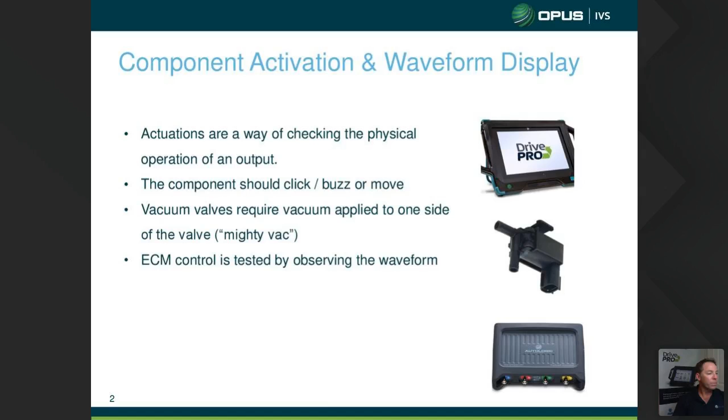It will check the ECM's ability to deliver a control message to that actuator or to that component. And the PicoScope's great at displaying that in nice pictures.

With any test we do, we have to have a reason for going there. So for this particular vehicle, I picked an absolutely brilliant car that always has faults in it - my Q7. I tend to use my Q7 whenever I do training because it doesn't matter, there are always faults in that Audi, and they'll be different every time. If you ignore one fault for long enough, it goes away and a different one comes in.

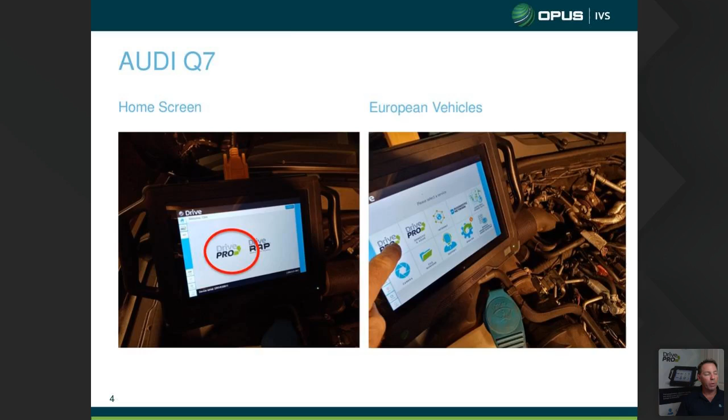So the first thing we do, we need to know what the faults are, so we do a quick test. It's quite simply plug the Drive Pro in, select Drive Pro, select European, select VAG because it's a Volkswagen Audi Group vehicle. Then we do our automatic detection, and it's picked up the VIN, it's picked up the engine code, and then we just hit continue.

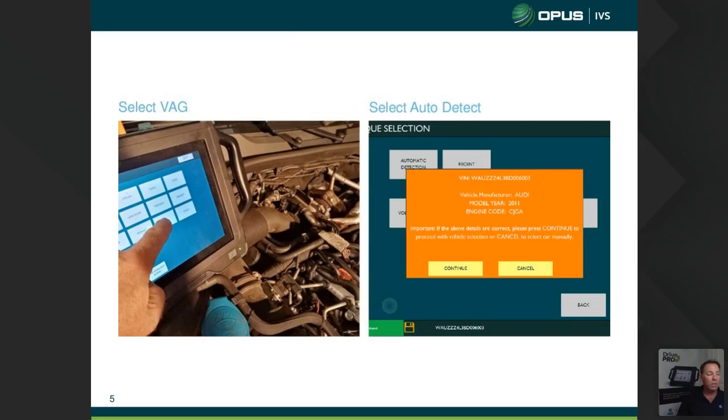Once we're into the vehicle, this is the menu that comes up. The first button on our Drive Pro tool is always Quick Test, and it's generally there for this reason because that's the first test we should be doing every time. We need to know what's going on with the car, so we run our quick test so we can actually produce a report.

The report gives us all of our DTCs along with freeze frame data that occurred when that DTC happened. So we've run this quick test report, and there it is. If you've got your downloaded files ready to go, you'll be able to see that a little bit clearer. But basically we've got an intake manifold flap, airflow control valve, electrical fault, sporadic - so it was intermittent. And the second code, we've got intake manifold flap, position sender short to positive, which is quite interesting.

As soon as I saw this, I was thinking, great, how much more money am I going to have to spend on this car? But it's good, it's great for training - you learn a lot working on Audis. So they're the two faults, they're the two components we're going to test.

We're going to go through and do the activations to actually test that intake manifold runner solenoid. So that's where we're talking about a dual plenum manifold, where we've got long paths and short paths, and the manifold just has a valve in the middle, and it changes from that long to short path depending on whether we're looking for engine torque or whether we're looking just for outright engine power or wide open throttle.

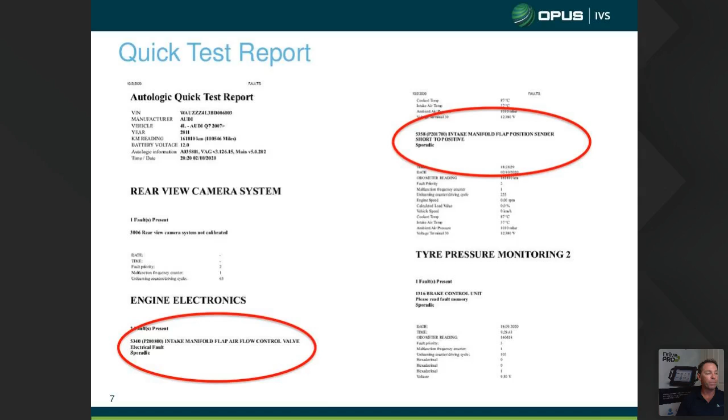So we're going to have to activate this with the scoping to see why - we want to know why it logged that code, we want to know whether the signal's getting down to the manifold itself. So we have to go into IMRC actuation, which is intake manifold runner control.

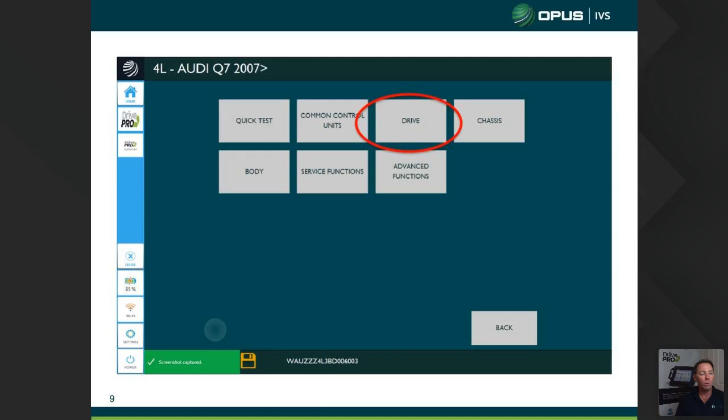So that's very simply from this same menu where we did our quick test, we come across to our drive unit, which is our engine control module. Then we select our engine electronics. Now in drive, we've got transmission as well here - we could do these same tests or similar tests on the transmission control, operating some transmission control solenoids, just to check and see why it's not changing in fourth gear or fifth gear or sixth gear. In this case, we're selecting engine control electronics, and then we hit next.

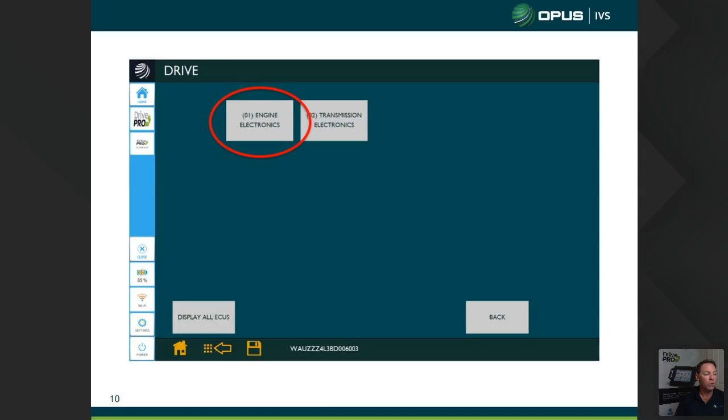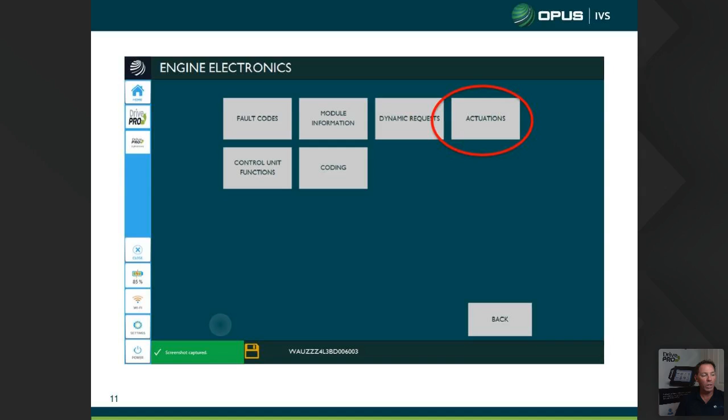So straight up when we're in engine electronics, we've got fault codes, module information. Dynamic requests in Audi is data - it's live data, it's data that's occurring, and they're all in measuring groups the Volkswagen way. Then we've got actuations, control unit functions, and coding for this particular vehicle. So we click actuations, and then we have these - we've got 2 pages of engine actuations.

Now, this is quite clever, this system, because I didn't realise there were so many output control devices on this Audi, and these are the ones we can test - the ones we've actually got capability of operating. Now, this particular car has active engine mounts - I didn't realise it had that. It also has an oil control valve solenoid or an oil pressure regulator valve solenoid, so the ECM can control the output oil pressure to the timing chain tensioner and other devices around the engine, which again, I think is a very, very clever system, and I didn't know the car had that. So we've got 2 pages on this particular vehicle.

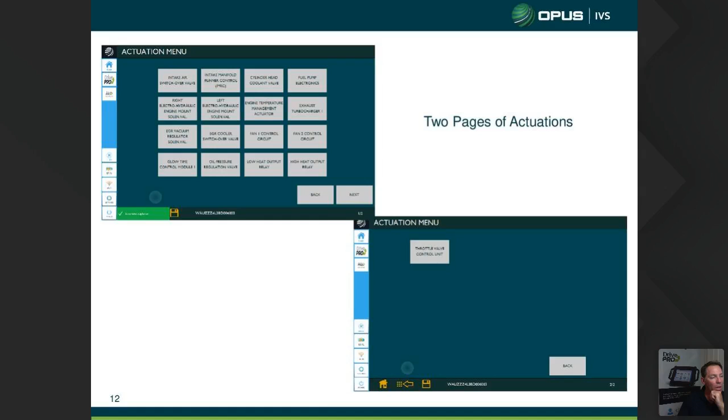So we're actually going to look for intake manifold runner control, which is on our first page.

Switchover valve. So these are all the ones we can test, and we'll test about 4 or 5 of these tonight.

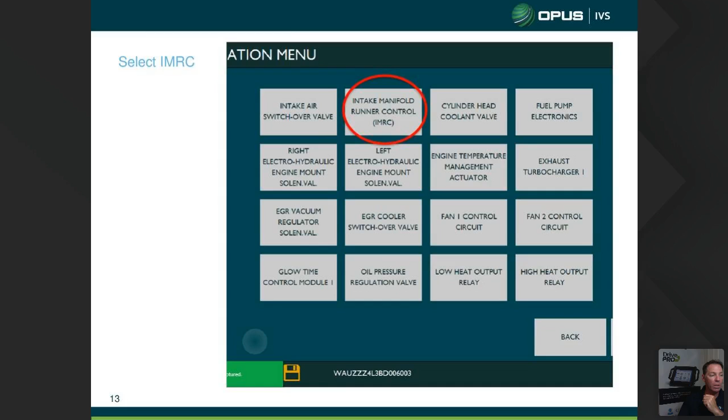We're going to click on the IMRC because that's where our fault code was. So we've clicked on that, it then goes to another page. We click on that and we get ready to actuate. But there's no point activating the solenoid until we've got our oscilloscope attached.

Now, with these particular cars, they've got valves and solenoids and actuators just mounted all over those engines. It's just an absolute mess. So sometimes I struggle knowing which valve is for what or which solenoid does what on the car, especially when you've got a bank of 3 or 4.

So what I used here, which is also on the Drive Pro tool, is the AutoLogic guided data. So we'll just recap. We did our quick test report, which guided us to a fault in the IMRC. We had a sporadic problem or a short to voltage problem. We had to locate the intake manifold runner control, and I did that using our AutoLogic data, just clicking on the location of that particular device. Now it's on the intake manifold.

Now there were 2 motor control units there and 2 valve type units, and you can see there's actually 2 valves in there. It could have been this one or it could have been that one. Guided data told me it was this H5, which was great because that's what I have to test. So the next thing we need is a wiring diagram so we know which pins to probe.

Now what we've done is we've located, if we go quickly back here, that's our diagram. That's obviously the pictorial diagram of the IMRC. We come back under the bonnet. Now that's somewhere at the front here in this bunch of mess. And if we just zoom in, we can see where our wires are.

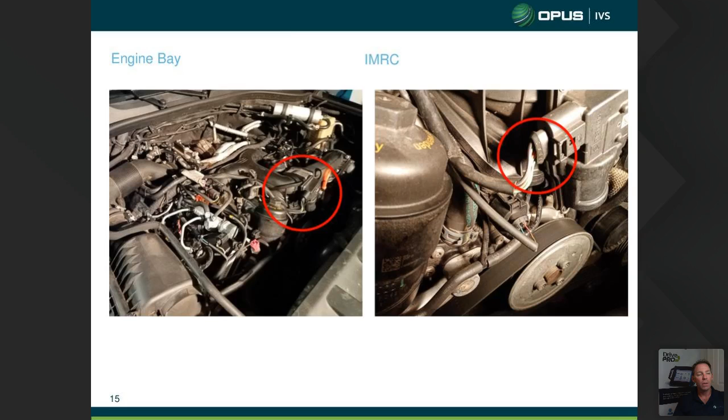And I think we've got 5 or 6 wires in this harness. And it's one of those 5 or 6 that we're going to probe, or 2 of those 5 or 6 we're going to probe.

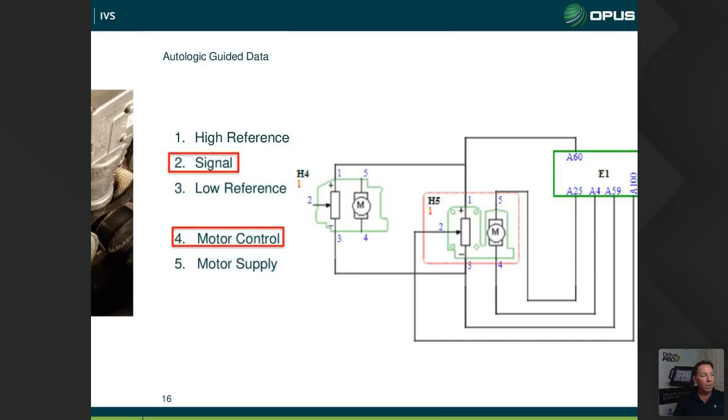Okay, so here's the circuit diagram that relates to this control unit. So it was H5, using AutoLogic guided data. Again, H5 is highlighted. What we've got labelled over here are what each of the numbers are, each of the terminals. Terminal 1 is the high side, our high reference from the ECM for the switch or the position sensor. Terminal 3 is our low reference, that's the negative side.

Terminal 2 is our position output, so that's our signal output there, number 2. So we're going to monitor that. We'll put 1 trace or 1 scope lead into that number 2. We'll back probe that one.

But we also want to make sure that the engine control unit is driving the electric motor over here. Now, we've got the high side driver on pin 5 and the low side control on pin 4. So the way these ones work, we've got 12 volt supply to one side of the motor all the time, and then we basically PWM or pulse width control the low side, the ground side.

So that's the one we're going to go for. We're going to go for pin number 4 and pin number 2. So when we actuate it with the scan tool, we can actually see, one, that our motor is getting a signal, something's happening there, so we should see a signal, we should hear a noise, we should see a valve open. But I also like to look at the position sensor as well, just to make sure that that is feeding back to the ECM, to make sure there's no problem there.

Now remember, when we use the scope to look at any data, we're looking at real data. We're looking at data that's actually happening at the actuator. We're not looking at modified data that we will see with the scan tool. So always keep that in the back of your mind.

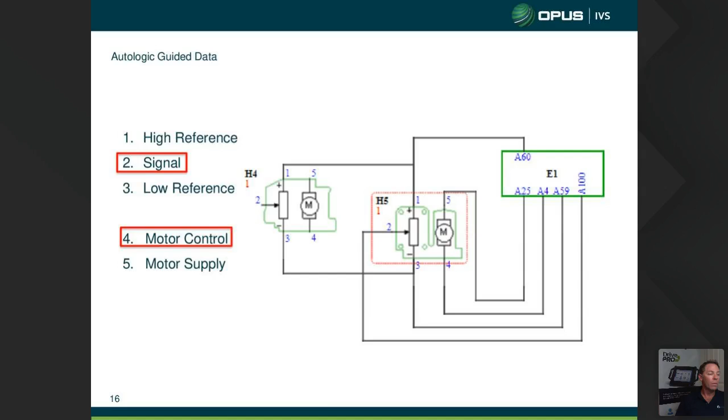And I have been caught where the data that I've been reading from the ECU is different to what's happening at the actuator. So when I do these tests now, I always use the scope. All right, so we know what we're going to probe on, pin 4 and pin 2.

All right, so with our oscilloscope, we need a ground, and this particular ground, I'm using a black alligator clip, and that's just up on the negative jump post, which is in the passenger side of the engine bay, towards the rear of the engine bay.

And here we are with terminals, back probe terminals, the pin terminals going to, I think it was number 2 and number 4. And I've color-coded them, so red is going to be channel B and blue will be channel A.

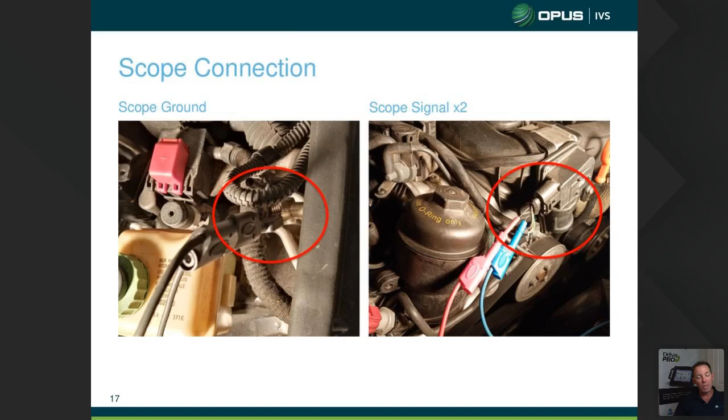So the next thing we have to do, once we've back probed, once the scope's connected, once we've got a ground on, we need to press Actuate on the scan tool. And the great thing is, that's all it is. That's your button on the Drive Pro, so it's pretty damn simple.

Now, whenever Drive Pro actuates on this car, what it does, it turns the component on, then off, then on, then off, and it repeats it about a dozen times. And it leaves it on for a few seconds, turns it off for a few seconds.

So basically, it doesn't just trigger it once. And I have had some scan tools that have done that, and it's a pain because by the time you've triggered it, you might not have recorded it on the scope, and it's a bit of dicking around. So the idea of the way the Drive Pro does this, it'll repeat the pattern, repeat the pattern, repeat the pattern, and it does it for every actuation.

And you'll see that when we see the waveforms, you'll see the pattern that's very, very repetitive with the same time base. So here we go. We're going to press Actuate and go to our scope trace. So what I was using was Pico 7.

I was using the new Pico software here. Again, it's not that much different to the old software. It's just it's a lighter version, probably a little bit faster. Definitely works on tablets very well. So let's have a quick look.

The red channel was going to my intake manifold runner control motor. So that was going to the ground side. If you remember the circuit diagram, that was going down to the low side of the motor. Our pin number 2, which we've got plugged into the position sensor, so that's channel A.

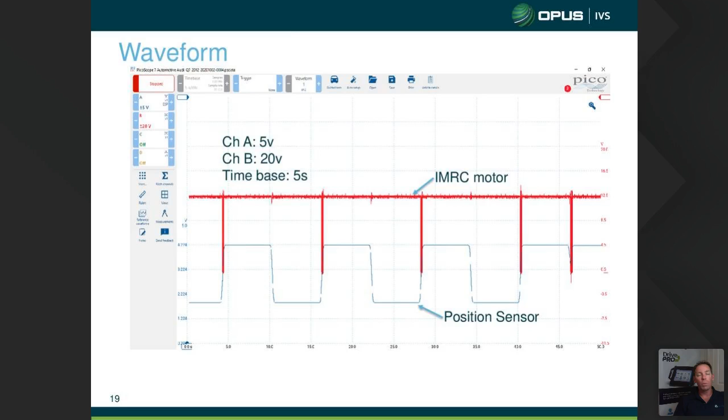I'm not seeing a lot of that signal, so I have to decrease my time base or zoom in. I'm going to change that back - let's have a look at the next page.

We've changed that back to 2 millisecond divisions, so rather than 5 seconds across the bottom, we've got 2 milliseconds across those divisions. Voltage is exactly the same. We need 2 milliseconds because that's how fast the driver in the ECM is activating this electric motor. We're sitting up here at about 12 volts - that high side is our 12 volt supply, and when it pulls down low, that's the low side. That's the ECM grounding that circuit to pull the motor open.

So you can see our on time between that point and that point is quite a lot more than our off time, which is that point to that point there. So this is driving the motor very, very slowly. Now, as our motor speed increases, the low side, or the time that it's actually pulled down to ground, will increase as well.

What we tend to look for here is just a nice square wave pattern, because what we want to see is that the driver or the transistor and the control module is doing its job - that the transistor is going open, closed, real square wave, real digital pattern. That's what we need to see across the bottom here, and we're getting that signal all the way.

There's always a little bit of a spike at the top because we've got current flowing through a conductor, so when we turn it off we'll always get that little bit of back EMF. It's very similar to the back EMF we get from a fuel injector when we turn it off, just a little bit lower. So that's a good pattern. There's no reason that code should have come on other than the fact it was an Audi.

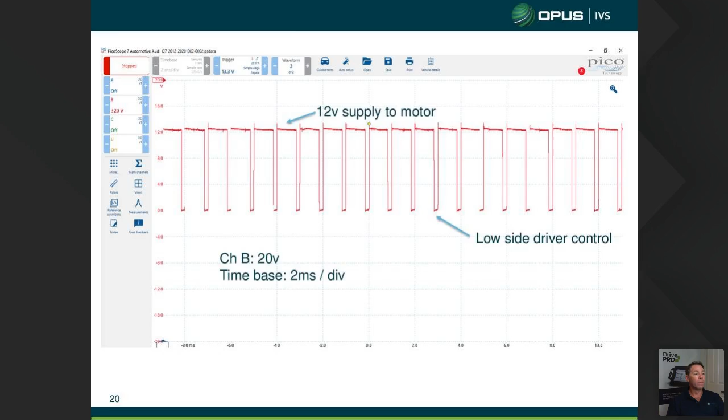All right, so let's move on to the next one - the EGR cooler switchover valve. That's one we're going to test next. We didn't have a fault code for this, but because we're doing component activations and this is another nice, easy one to get to, we'll do it. We'll have a look at it.

So again, back in our actuation menu, come down here - EGR cooler switchover valve. Now, I had no idea where this was, again.

So I'm going to use Autologic guided data. Just excuse me - apologies for that, I needed to sneeze.

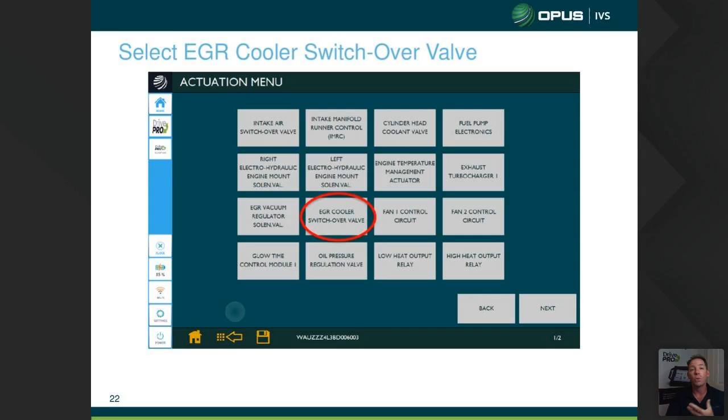Okay, so EGR cooler switchover valve - we don't know where it is, so we're going to use Autologic guided data again to find out. Here's our circuit diagram that's come up. So when we punch that into the guided data, it's told us here's the code for the solenoid valve, V8. Now it's just an electromechanical solenoid, and it's showing us it's a vacuum solenoid.

So we could test this solenoid by disconnecting one of those vacuum lines, putting our Mityvac on it, and applying vacuum pressure - hello Patrick, that's good - and then using the Drive Pro to activate it and watch our vacuum drop down every time it opens.

So what I'm looking for here is the scope side. I want to see that the signal is getting to this solenoid and that we're getting the right feedback. So the fact that it's an electromechanical device or a solenoid, we should see some sort of square wave and some sort of back EMF every time. Number one is 12 volts, number two is our low side driver, our low side control.

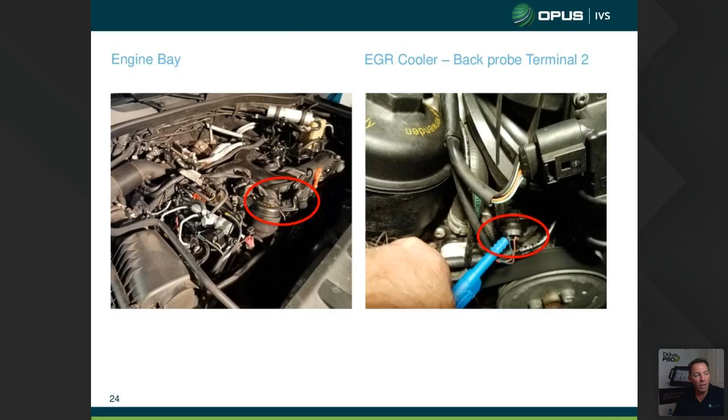Right, so this is the area this particular solenoid's in. I did use the guided data to find this, but I haven't put that page in here. It actually hides right down under here where we were testing 5 minutes ago. So that's that plug we were testing at, and it's actually down here. You can see the two wires, terminal 1 and terminal 2. If we go back to the circuit diagram, there's terminal 1, terminal 2. Now it doesn't look like it, but I am actually in terminal 2 here, the ground side.

All right, so while we've got the scope in, let's press actuate and look at the waveform. This is much more exciting in real life, by the way - you're looking at photos at the moment, but when we do this for real in a classroom, whenever we're allowed to get back to that face-to-face training, it's definitely much cooler.

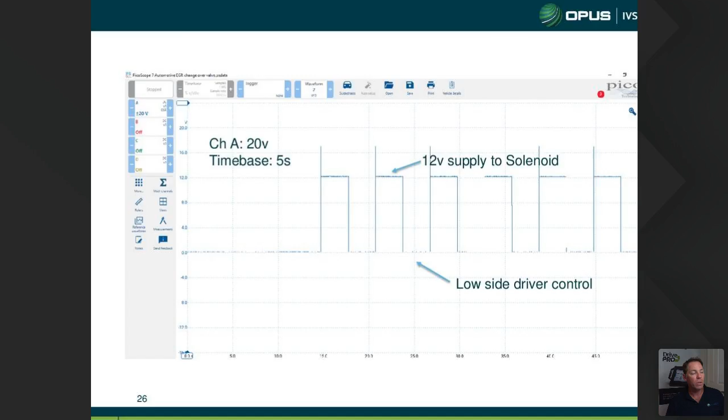All right, time base 5 seconds. The reason I'm using 5 seconds is because it's a real-time measurement. We turn it on, we turn it off, we turn it on. This is the test that the AutoLogic tool does, the Drive Pro.

So there's a 12 volt supply. Even though we're probed in with one probe on the drive side, whenever the driver is turned off, we're reading voltage through from the fuse down through the solenoid to where we're actually back probed, which is why we'll always see 12 volts there. And then when the driver in the ECM pulls it down to ground, we see the signal get pulled down to ground. Now we can see it's pulling down there.

Now, while this is activating at the same time, make sure if you guys are doing it, just put your hand on the solenoid, make sure you can feel it clicking. Put your Mityvac in, apply vacuum to it, make sure you can see every time it clicks, we lose vacuum. But what we're checking here is the activation of the component.

Now, here's our little back EMF. This is what I talked about before. So here's the solenoid turned off. As soon as we trigger it, it comes back on and we get this big back EMF spike. So we need to see that. If we're not getting a back EMF spike and we're just getting a square wave pattern, there's a good chance that the solenoid's not working properly, or the solenoid's stuck, the solenoid's not moving.

Think back to when we talk about fuel injectors, if we don't get that back EMF spike, we're not actually getting the pintle moving and collapsing back across itself. The same sort of thing happens here. If we're only getting a square wave pattern, then we're getting the driver signal down, but we're not getting this mechanical movement inside there.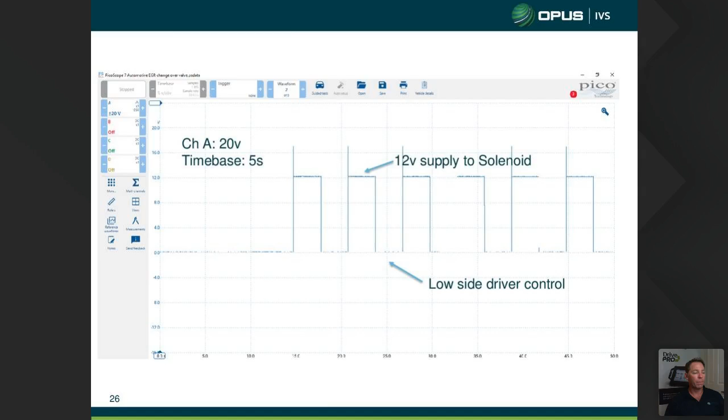Okay, our next one. So this is quite interesting. Fan number 2 control circuit. So you would have seen back on our actuation page, we can control fan 1 or fan 2. This thing's got 2 dirty big fans like this on the radiator.

Now, each of those fans has its own control module. And the control modules are fed with 4 wires. One of those wires is high current power, one is a high current ground, one wire is a ground for the computer, the little control module itself, and the other one is a LIN bus wire. Because the way these are controlled, these are a master-slave system. The ECM, the engine control unit, is the master unit, and the fan control module is the slave unit. So it actually sends a signal via LIN down that particular wire.

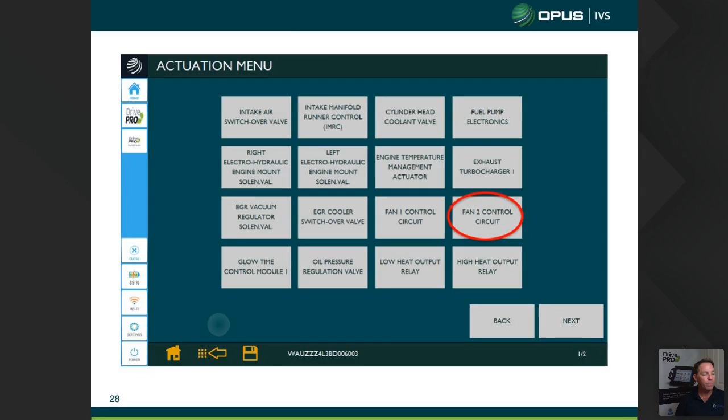All right, so let's look at the next one. So because we're testing an electric motor, I like to use an amp clamp, exactly the same way I would test a fuel pump. Now, looking at electric motors with an amp clamp is very cool because it actually tells you if the motor's moving.

In this case, I'm going to test a fan motor exactly the same way. Low amp clamp over the high current wire. If we look back here, that is going to be over this one, so terminal number 1, that's my high current.

And then channel 1, I'm going to back probe into the LIN bus wire, and the LIN bus was terminal 3. So what I'm looking for here when I do my activation, I want to see that we've got LIN control. We want to see the LIN circuit or signal change from off to on. And then I want to see the current ramp up using the amp clamp, and I want to see it reach whatever the fuse on this circuit's rated at.

I can tell you that if I clicked on that fuse, that would be a 25 amp fuse. So what I'd want to see out of this electric motor is somewhere around 15 amps peak, so sort of two-thirds of my maximum current flow. Okay, here we go.

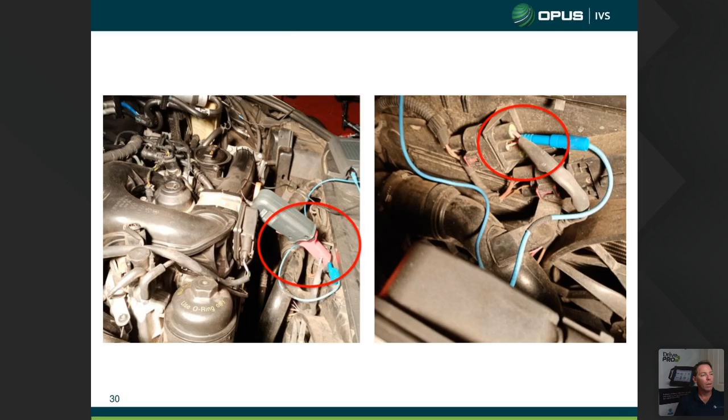Press actuate, and go to the scope, and we'll see what happens. So our first page, I've turned off the amp clamp just to make this one a bit clearer, plus I've also had to zoom in a lot to see the LIN message.

So when I use an amp clamp and I look at an electric motor, I'll probably look at a 5-second per division break in my time base because it's real time. The trouble with LIN is it's a very fast message, so I've got to increase my time base so it's faster so I can read more. So I come down to 500 milliseconds per division.

So this is my LIN message, this is my fan command off. As soon as I turn the key on, this is the message that goes down from the ECM to the fan control motor, and there it is, that is an off signal. Then as soon as I hit that actuate button and it powers up the fan, my message changes to that - that's fan command on.

Now what happens, again, just like the solenoid test before, it does exactly the same thing with the fan motor - powers it up, lets it spool up, turns it off, lets it spool down. It's about 5 seconds that it leaves it on for. So what you see, if you looked at this whole trace, not just this one page, you'd see this off signal for 5 seconds, then this changeover, then the on signal for 5 seconds.

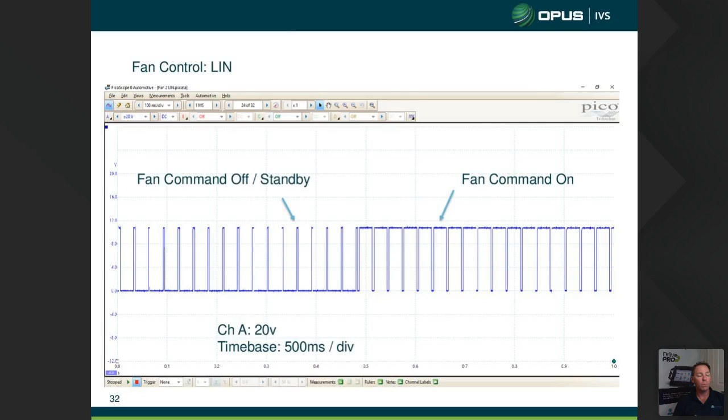If I have that message getting to my fan motor, guess what - the ECM's doing its job. The problem's not in the fan motor, I can move on. Or it's not in the LIN circuit, I should say.

All right, next page is my current flow. So this is the actual current flow through that low amp clamp. Now I've changed back to Pico 6 on this one because it was a little bit more user-friendly for me. My scope settings here, this is channel B, the red one. I'm using the -5 to 20 amp clamp, that's the 60 amp clamp on the 20 amp mode. And my time base is now 5 seconds per division.

The reason I split these two is because when I have them both on the one page, we can't see the LIN message because my time base has to be different. So over here, we can see our red line is sitting at 0 amps - that is when the fan is off, or it's in standby mode. As soon as I press actuate and it powered that fan up, I go from 0 amps up to - I can't even read that, whatever that value is.

And then it slows down a little bit and then it ramps up again. And this was my peak current flow here, and that must be around 15, 16 amps. So there's my 2/3 of that 25 amp fuse. It stays on for about 5 seconds, and because I'm on a 5 second base, I've got 5 seconds between there and there. So that's my on time: 1, 2, 3, 4, 5, and then the motor slows down and it turns off. That's what I need to see.

So by doing a simple test, now I might not be able to see the fan. In this case, it's an electric fan. You're going to hear it, you're going to see it. If it works, it works.

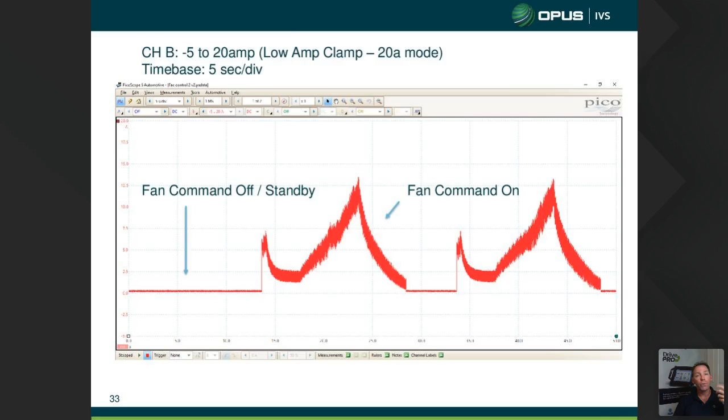All right, so that's what I'd expect to see for that one.

All right, our next output control that we're going to look at is the throttle valve control circuit. Now, yes, this is a diesel, but it still has a throttle control motor. And we use the throttle valve on a diesel for a couple of different things. We use it when we turn the engine off.

So when we turn the key off, we not only stop the fuel, but on all diesels now, we shut the throttle valve completely to cut the air off. And the reason we do that, it prevents the engines from running away in case they get a bit breathy or they start drawing a bit of oil in from blow-by gases that go up past the turbocharger, or even oil coming down past the injector seals. So we are shutting the fuel off most definitely, but by shutting the air off as well, we're guaranteeing that engine's going to stop. The other reason we have a throttle valve on our diesels is for blending air with EGR.

So when we operate the EGR valve, or when the ECM decides to operate the EGR valve, it draws exhaust gases easier from the exhaust manifold if I can shut off some of the intake air. Because remember, engines are lazy, they'll pick air from the easiest point, a bit like electricity. And if the throttle valve is wide open, the airflow will come in there and it'll take a lot more air from there down into the intake than it rather would drag exhaust gases out. But by restricting the intake flow of air, as the piston drops down, it's got to draw air or gas from somewhere to fill the chamber. So it's more than likely to pull it out of the exhaust system through the EGR. So that's what we use the throttle valve for on diesels.

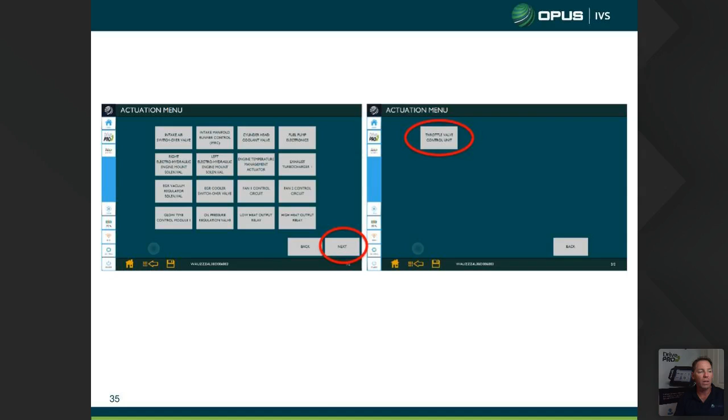So here we go, we want to go to the throttle valve. In this particular instance, it's on the next page. We hit next, and there it is there, and we click on that one, get it ready to go. Next page. Again, we need a circuit diagram because I'm not a Volkswagen person, so I don't know where all the wires are. So here we go.

H4 this time is the one we want. H5 is what we tested before. We're now testing H4, this is our throttle valve. And it's wired up exactly the same way as that valve. We've got a position sensor here, high reference, low reference, and signal out. And over here, we've got an electric motor with the voltage in and the voltage out.

Now, just be aware that some of these throttle valve motors do change a little bit. They might not have a positive side on the top or a negative side on the bottom. They might have what we call a bidirectional driver on both sides. And what that means is we can change the feed in from negative to positive or positive to negative. And what that means is we can push the motor, push the valve open using electricity, or we can pull it closed using electricity.

Most petrol engines are like that these days. The electronic throttle control on most engines uses bidirectional drivers. So just keep that in the back of your head.

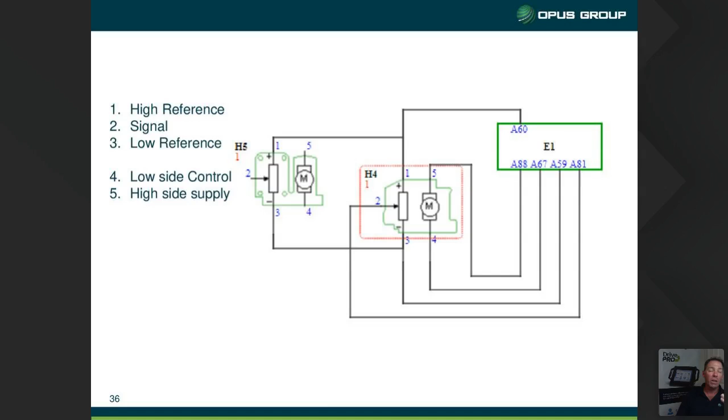All right, here we go. These are our connections. So again, we're going to look at probably the signal output here and our low side control there. Now, being that it's a throttle valve, it's wired exactly the same as our IMRC motor, we really should see a very similar pattern. So let's have a look.

Let's find where it is. There's our throttle valve over here. Here's my connector. This is actually a little bit hard to get to, it's way over the back and underneath there. But I managed to get the connector in the back probe. So this is our first terminal we've plugged into, and we'll put another one in there for our position sensor.

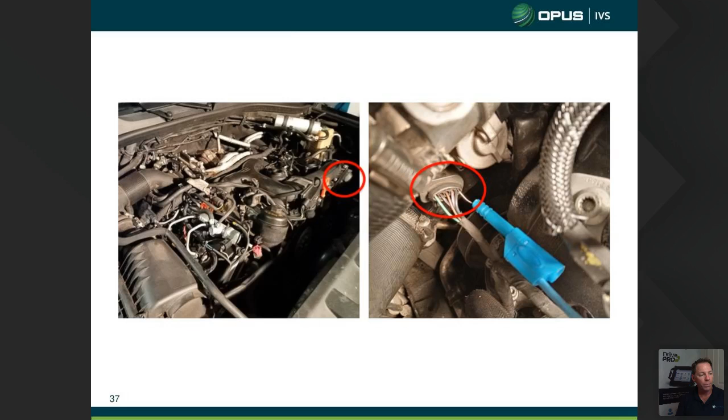All right, here we go. Press actuate, and let's go to our trace. So what we're seeing straight away is now we're on a 5 second per division time base across here, and I'm using 20 volts on one side and 5 volts on the other. Now this is very similar to the other one, where it was only turning on for a very brief amount of time. We're actually pulsing this quite a lot. So we're operating this really, really quick to wind that motor open and then wind the motor closed.

So when we look at our position sensor, we can see that we're closed, closed, closed here for 5 seconds, snap open. Now we're open for 5 seconds. Now you can see that change between open and closed in my position sensor here corresponds with the gap in the electric motor there. So we're driving it closed in this case, then we're driving it open. Drive it closed, drive it open.

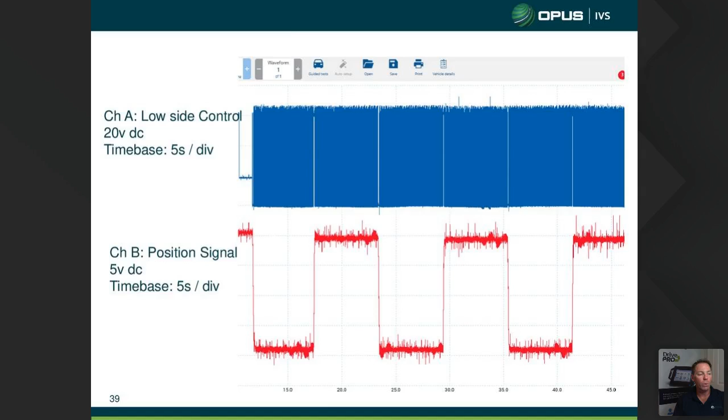Now I can't really see my electric motor signal. I can't see the driver's control to that motor very well. So I'm just going to zoom in on that on the next slide.

And here it is here. So my time base has changed to 2 milliseconds per division rather than 5 seconds, but my voltage is still the same. And you can see I'm going from 0 to 12 volts because that's what the circuit voltage was in this car. So you can see the square wave pattern. We can see that

we've got 12 volts applied, we pull it down to ground for a very short period of time. 12 volts applied, pull it down to ground. It's a square wave pattern, it's an electric motor, it's not a solenoid, so we're not getting that spike that we do on solenoids. That's a good pattern. That's what we should be seeing on any one of these type driver devices.

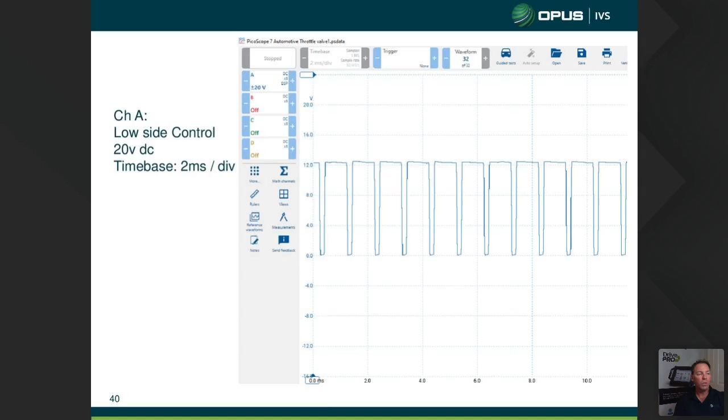If that was flatlined down here at 0, we'd simply say that we've got open circuit in the control wire, or there is no driver. The transistor inside the ECM has failed, it's gone open, or it's just not operating. If we saw that stuck up at 12 all the time and we're testing on that low side, that would be a short to voltage. So you really do need the circuit diagrams to know what you should be looking for on these waveforms.

All right, very quickly, on to the next one, fuel pump electronics. So let's have a look at this. Let's go into actuations for that. There's our fuel pump electronics. Now this is actually a very cool function on this car. So what the fuel pump electronics actuation does, it just turns the low pressure pump on in the tank.

Now the low pressure pump on these diesels operates around, I think, 50 to 60 psi pressure. So it's kind of in the range of multi-point fuel injected or even GDI in-tank pumps. So we can treat it exactly the same as we would a petrol vehicle.

Now, the good thing about having an actuation on our fuel pump, especially on a diesel vehicle, think when you're servicing the car, think when you change the fuel filters and you've got to prime the system back up. If you get a lot of air in, let's say it's Colorado and you've got two dirty big fuel filters underneath. With the Colorados, I know you've got to sit there and crank the engine, turn it off, crank it, turn it off, crank it, turn it off to prime the system to bleed all the air out of the filters. Well, with the European stuff, sometimes it's a little bit harder.

Having this activation button on the tool means that once we replace our filters or fuel line, or whatever we happen to be doing, we can actually prime the system and self-bleed it by activating like that before we even crank the engine. That saves a lot of heartache of misfiring and rough running engines, noise, and that panic you get when the car doesn't run properly, especially a Euro vehicle. So that's what that's also handy for.

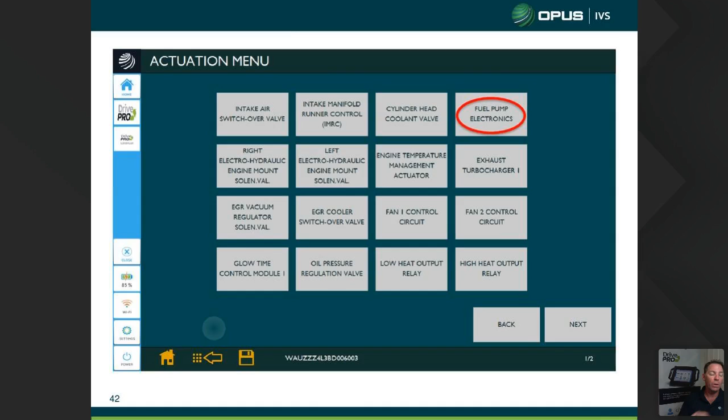But in this instance, we're going to test it because we might have had a problem with the fuel pump. Maybe the car doesn't start, and I want to go, well, is the fuel pump actually working? This is a good way to do it. So there we go, go to next.

For this particular vehicle, I was thinking I'm going to put my low amp clamp, my 60 amp low amp clamp, on the feed wire to the fuel tank, to the fuel pump, and I thought that'll be awesome because it'll just be under the back seat. It's not under the back seat on this car. It's a two-part fuel tank, actually under the car. You've got to lower the fuel tank down to get to that. To lower this down, basically the rear cross member has to come out, the rear final drive has to come out, the tail shaft has to come out. For the purpose of doing this webinar, there was no way in hell I was going to do that.

So I found that out simply by going again to the guided data and looking at the location of it. I went, you know what, that's too hard. So there was another way to do this.

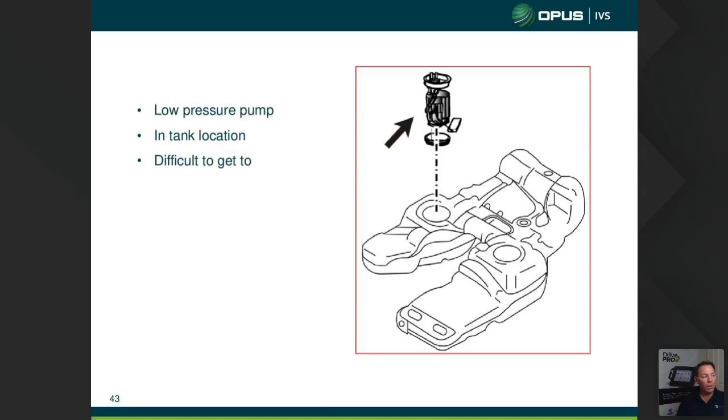I went to the fuse. Again, guided data told me where the fuse box was for that, up here on the left side of the engine bay somewhere. It told me it's a 25 amp fuse, where it's located, and it gave me the location right there. That made life a lot easier, because if I can test the fuel pump fuse for current using the scope, it saves me a whole lot of time.

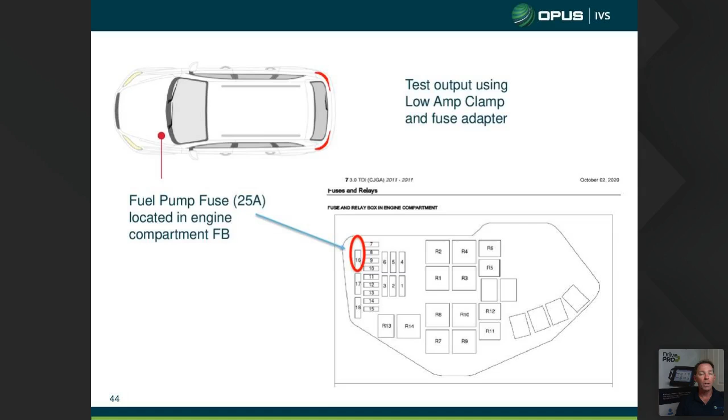And here's how we did it. So that fuse box lives up over here, somewhere beside the fuel filter that we just replaced. What I'm using here, once I've popped the top off the fuse box, is the fuse piggyback wire.

If you haven't seen those, they're the best invention really since the inflatable wheel. You pull the fuse out, you put this piggyback in, the piggyback's got a loop of wire on it, and then we put our original fuse back into this fuse holder on the side of that loop. That loop allows us to put our amp clamp over the top and read all the current flow through that wire. Now, this being the fuel pump fuse, every bit of current that powers that fuel pump, I can now read.

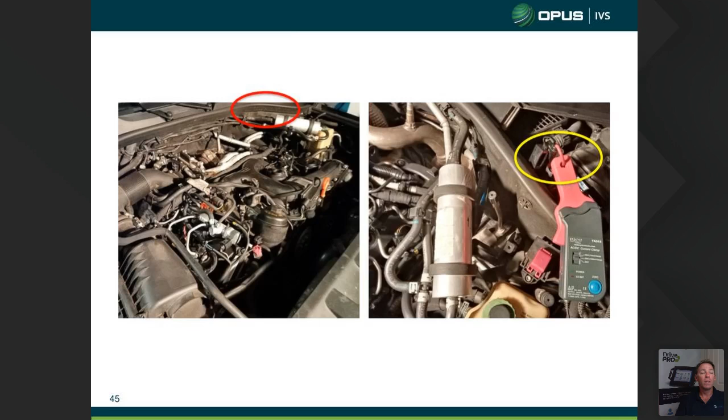I'll read it exactly the same way that we did the fan control motor, and that's what we're going to do here. So we're going to actuate it, and we're going to look at the waveform. And there it is. So this is really interesting.

Again, I've got 5 seconds per division, because it primes it for 5, turns it off for 5, primes it for 5, turns it off for 5, and that's what we're seeing here. When this current goes from 0 to high, we have pump on, then we have pump off down at this 5 second interval down here.

Now, you're all going to ask me, and I know it now, what's this spike here? Is that back EMF? No, it's not, because this is not a solenoid, this is an electric motor. But what you are seeing on this particular fuel pump is the initial breakaway current that pump needs to get spinning.

So for any auto elects that are out there listening, you often look at breakaway current when we first crank the engine, and that's the massive amount of inrush current from the battery to the starter motor that we see to get the starter motor turning, to break the friction of the crankshaft bearings through the oil and get the crankshaft turning. Once the crankshaft's actually turning, we see that current drop back down.

That's exactly what we're seeing on this particular device here, because we're looking at amps, right, not voltage. So we're seeing this big spike of current to get that pump to turn, and then it drops back down pretty quickly. Now remember, this is a 5-second division.

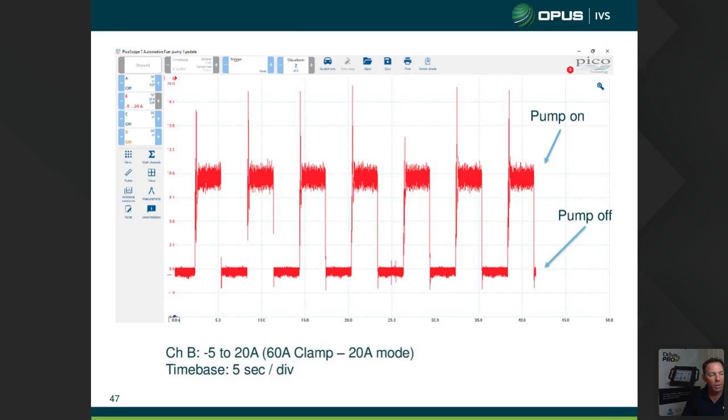So we do tend to look at this a lot with starter motors because the starter motors tend to turn over fairly slowly, so we can see it very well. Fuel pumps are exactly the same. We can start to see problems in our fuel pump before they occur.

And what I mean by that is the reason a lot of fuel pumps fail is not so much because of, well, it is, they do fail because of dirt, gunk, water, the connectors on the ends burning. But basically, they're a brushed DC motor. They wear out, those brushes wear out. You can't do a visual inspection on them. So a good way to look at it is look at the segments using your amp clamp.

And you can start to tell whether a fuel pump's going to fail. We did one in New Zealand as a test, and we could actually see it. Every second rotation, it dropped 2 of the segments in the commutator, and then it had come back, or 2 of the segments where the commutator went past the brush. And what it appeared to be was that as it was rotating around, the brush was just worn that much on that particular section that it would just glide over the top of the commutator and not actually transmit any current. And that's where we'd see this drop down to 0.

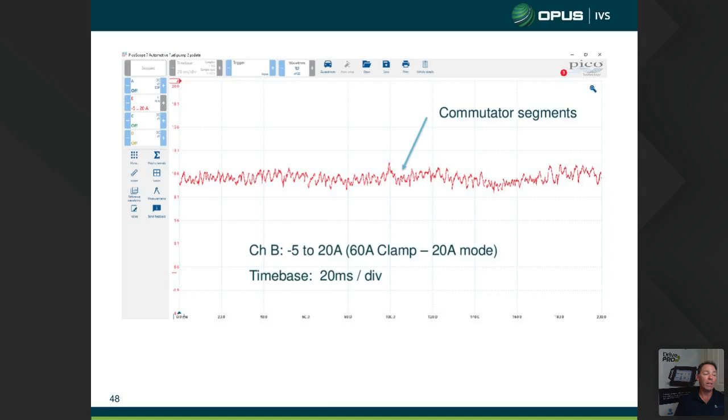So using this method of activation and follow-up with the scope, that's a good way to look at problems before they occur. And I'm not saying do this with every customer, but you might be looking at cars that may have a high instance of failing in a fuel pump, and at least you can give the customer a bit of an idea what's going on.

Okay, so now we're going to have a look at the EGR vacuum regulator solenoid valve. So here it is here. This is the cooler, and this is the one that opens and controls the EGR valve on this particular car.

I wanted to leave the EGR valve to a little bit later because they're a problem for us. The number of EGRs that I see fail just in my travels, and I'm not even full-time in the workshop, so I can only imagine how many come through your doors with problems - gummed up, sticking, not working, shorted, who knows. I know they're a big issue.

So we need to know how to test it, and a great way is to activate it, have vacuum on one side, have the scope on it as well. Let's see whether we're getting a signal from the ECM. Let's see if the vacuum is moving, if it's clicking, if the electric motor is moving. So here we go, we're going to select that one.

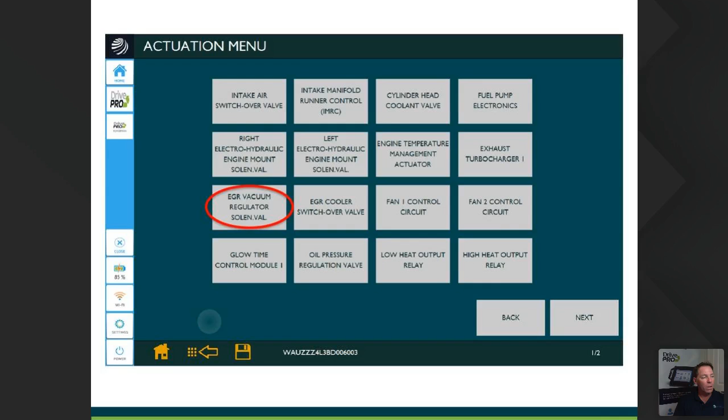We need the circuit diagram. Here it is. So this is a vacuum type. Again, it just shows a solenoid motor with a feedback position switch. And what we've got here is high reference, the solenoid low side control, low reference and signal.

So this circuit over here is our position switch. Now you probably notice that all the position switches we've seen tonight are all exactly the same, regardless of where they are. It doesn't matter if it's an Audi, a Mitsubishi, or a Mini - it really doesn't matter. The position switch is going to be identical in operation because that's how electronics work.

99% of them use a 5-volt high reference, the rest have to have a ground. The signal return is always labelled like that, and it's going to be somewhere between 0.5 volt and 4.5 volts on every one. Once you know that, it makes testing a lot easier.

And this is a solenoid, so obviously we should see high side here, 12 volts in, low side out. So we test terminal number 2 - yep, there it is. We're going to activate it, and we should see a square wave pattern, and being a solenoid, a bit of back EMF because we're looking at voltage.

This is the general location of this solenoid - there it is, nice easy one to get to. I'm back probed into pin 2. I'm not in the position switch, which is down on the side. All I'm looking for is the driver signal.

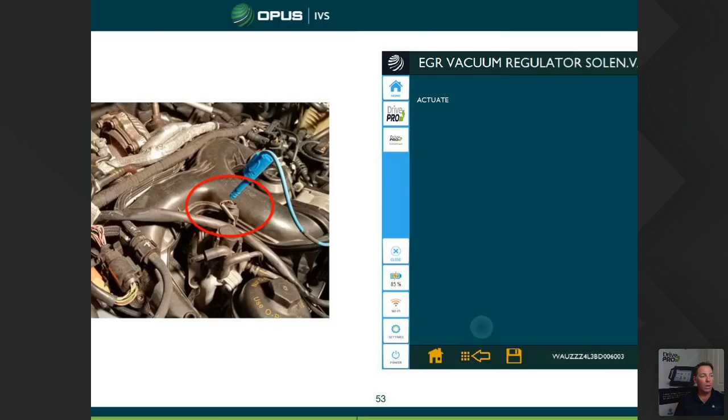Okay, actuate, here we go. Let's see what we get. And... nothing.

So this is my car - this is actually happening on my car. I went back and pressed it again. There was nothing. I held the vacuum solenoid - no clicking, absolutely nothing. I put my Mighty Vac on it - wasn't operating.

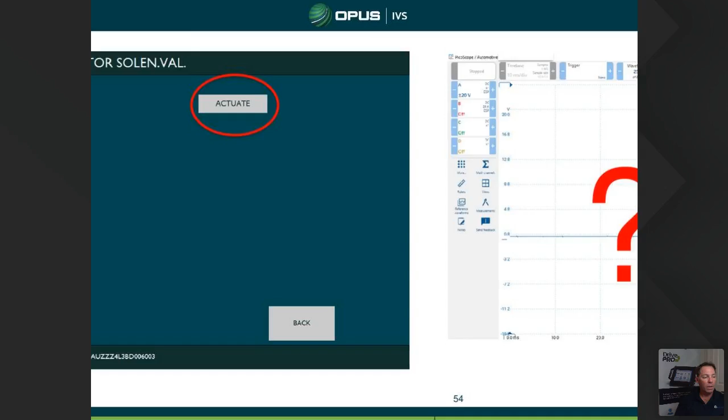So when I saw this voltage sitting at 0, and I've got that into pin 2 - from all the stuff you've seen tonight, you should be seeing a square wave pattern because that's what should be happening. Now I can tell you the tool's not broken, the tool's working fine. This is the actual output value on this car. So this is where we go.

So remember, we're looking at a vacuum solenoid because we've done a quick test. The quick test has led us to a problem in here. It might be that the position sensor is out of range, it might be that the feedback voltage from here is sporadic or not working. But you've come to this point and you've actually found that there's no voltage, so this is where you've got to do further testing.

Now, in this instance, because of my test location at the solenoid itself, I then need to move my probe back up here to the ECM, back probe there, and see if I get the square wave coming out of the ECM. If my square wave is there, if it shows up, then I've simply got an open circuit on that wire. Problem solved - fix the open circuit, job done.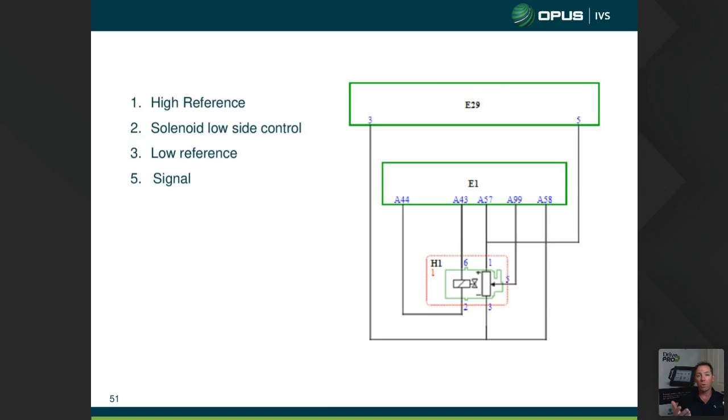If I have no signal when I back probe there, well, I probably need to pop that connector off and have a bit of a look at the terminal, make sure it's not spread, make sure it's not an open circuit problem there. In this particular instance, the engine control module - let's get the picture of it.

The control module on this car sits just up under this little plastic flap there - it's very, very easy to get to. And I did this the other night, and I just simply moved that from there back up to number 44 and just back probed it in.

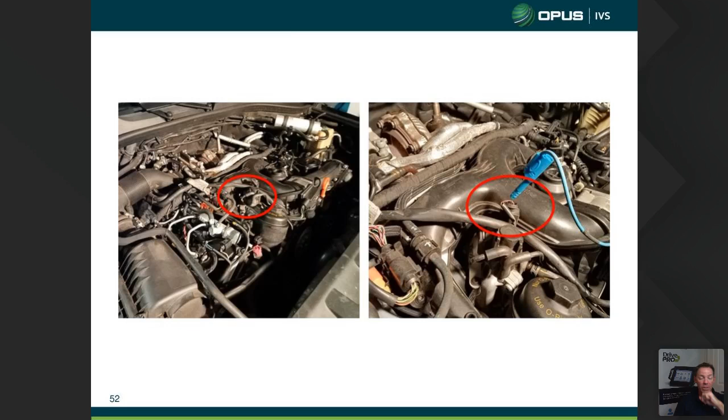And I did the same activation test, and we had exactly the same result. We had 0 volts coming out of the ECM. So my EGR is not working.

Is that a good thing? Yes, it is. Because a few years ago when this car was purchased, it had an issue with the EGR valve, and it had a modification done to it back then, not done by us, and I don't condone this, but it had a modification done to turn the EGR system off.

I didn't know about that until I did this test the other night. So once I did this test, I went, oh geez, there's something wrong here. I started thinking about the history of the car, and I rang up the previous workshop that did some work on it, and they confirmed, yeah, this is what actually happened. So there's always a reason for what we see here, and that's what's happening.

The EGR is activated, but the voltage is sitting at 0. So in this case, on this vehicle, it's a good thing. The EGR valve's not being opened.

But if you're presented with a problem where a DTC comes up in your quick test report, leads you to perform an activation, you can see an activation is very easy, very quick to do. You can see that all those solenoids have a very similar pattern. It's real-time activation, set it at 10 milliseconds per division, and your voltage will generally always be 12.

Electric motors are a little bit different. But the testing by using component activation is very quick and very easy, and it tells you pretty much what's going on. In this case, when I first saw it, I thought open circuit, there's a problem between the two. Because I've got the circuit diagram handy on the same tool, it was just simply unplug, plug, test.

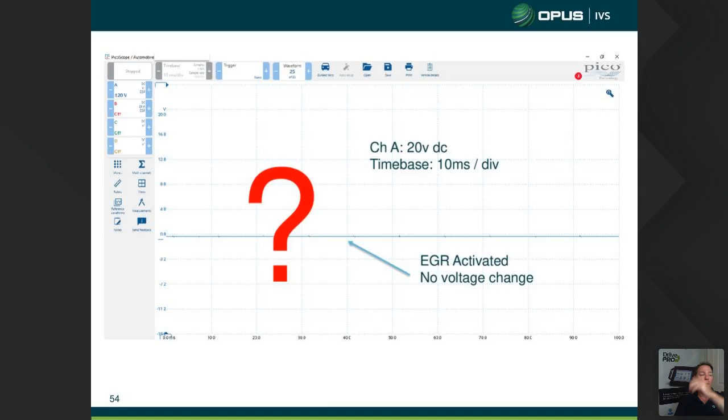And that's it, that's it for component activations. There was a whole lot more in there we could have done, but at the end of the day, you would have noticed for the 4 or 5 solenoids we checked, they were all exactly the same. And I could have gone through and tested those engine mount solenoids. I could have checked the oil pressure control solenoid.

The result would have been the same. Same square wave pattern on for 5 seconds, off for 5 seconds. Same little back EMF spike. Once you see how one solenoid works, they're all identical. A fuel injector is a solenoid, works exactly the same.

So as long as you've got the ability to drive the component and a scope to look at what's going on, you can tell exactly whether that component's working or not, or whether the control signal from the ECM is getting there. And that is the end of our session, and I've gone in under time at 7:56. First time ever I've come in under the hour.

All right, so if you have any questions, flick them through in the chat box. Either everyone went to sleep, or no one had any questions, or you all went off and got a cup of coffee. Oh, I had a cup of coffee and I let it get cold in front of me.

It's cold. Yep, no worries, Pat. I hope you all got something out of that, even if it was one really small bit of information, because anything in the diagnostic arsenal definitely helps.